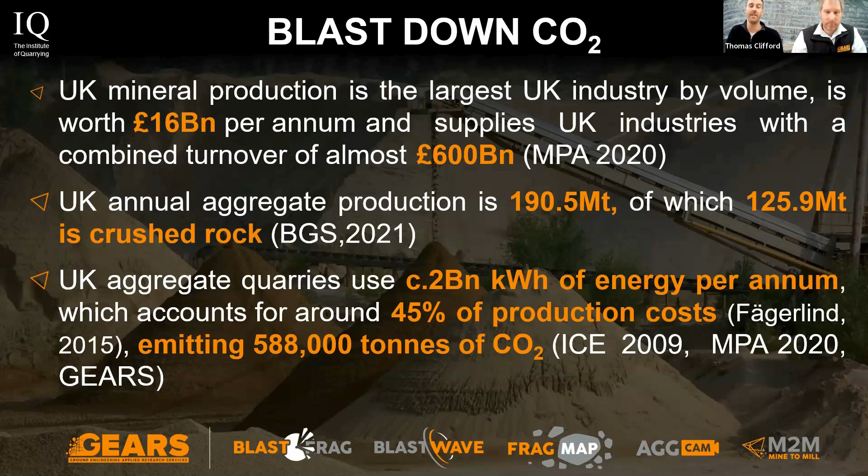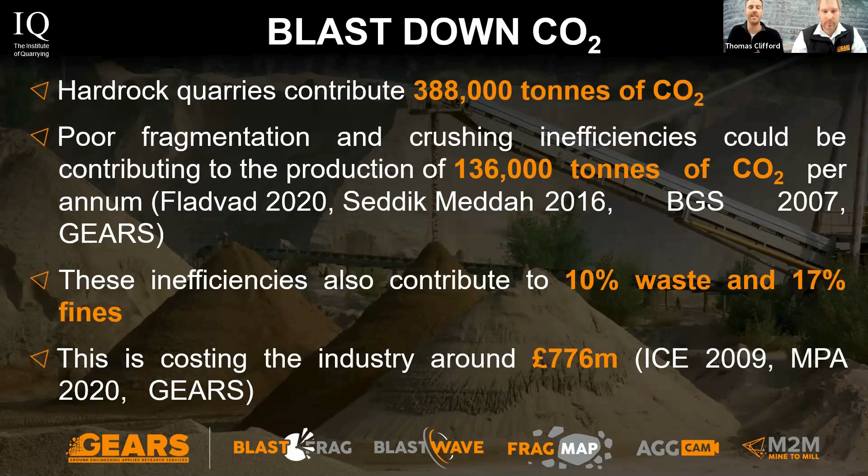Of that figure, the hard rock quarries specifically, which we'll be focusing on today, equate to about 388,000 tonnes of CO2. We know that poor fragmentation and inefficiencies in crushing operations can contribute up to 136,000 tonnes of that, based on the research carried out. The inefficiencies contribute to 10% waste and 17% fines within the process, and it's costing our industry £776 million per year.

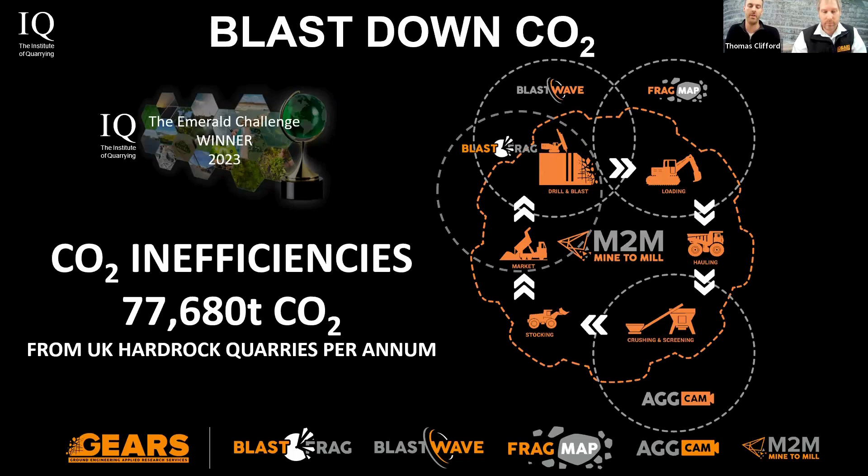As part of the Emerald Challenge, we're tasked to look at how we can reduce the CO2 inefficiencies, and the opportunity that we've found so far in the process is around 77,000 tonnes of CO2 from the hard rock quarry specifically. So we'll talk you through this process flow.

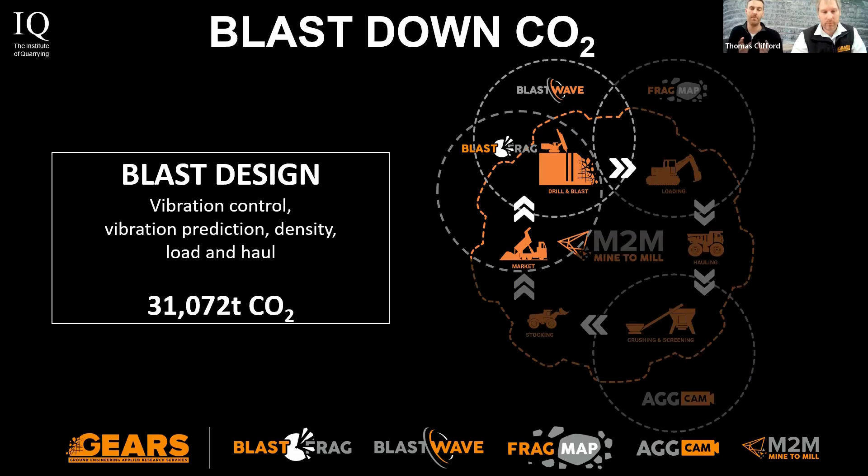Starting off at the very start of the process, looking at the actual blast design and how we measure the vibration control, review vibration prediction, the density of the rock and the load and haul processes. There's a 31,000 tonne CO2 opportunity there for us to focus on.

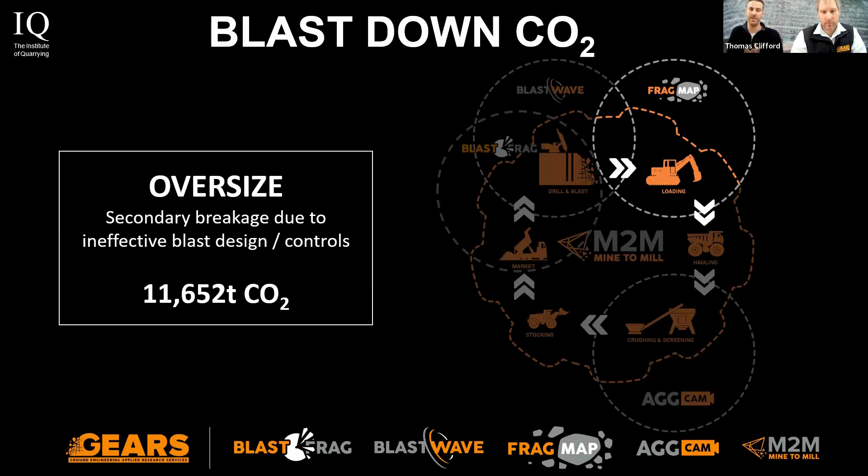As we then go into the oversize, after the blast, looking at secondary breakage due to the ineffective blast designs and how that has an impact on the CO2. In this specific area, around about 11,500 tonnes of CO2.

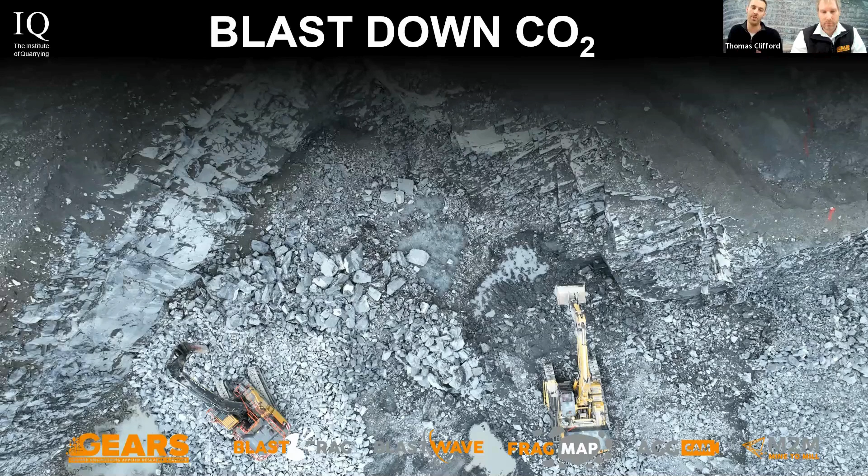Just on this image below, this is one of our development areas that we've looked at as part of the process. You can see there just the cost of the oversize. You have one excavator on load and haul operations, you then have the oversize in the middle, and then on the left-hand side you have the breaker. It's just all of this additional cost and inefficiencies in fuel burn, operator and man hours, and the oversize that slows down the throughput and production.

As we look at the blast design process, we know combined there's 42,724 tonnes of CO2. This just shows at each stage of the process the significant potential in CO2 savings and how we can be more efficient within the operation.

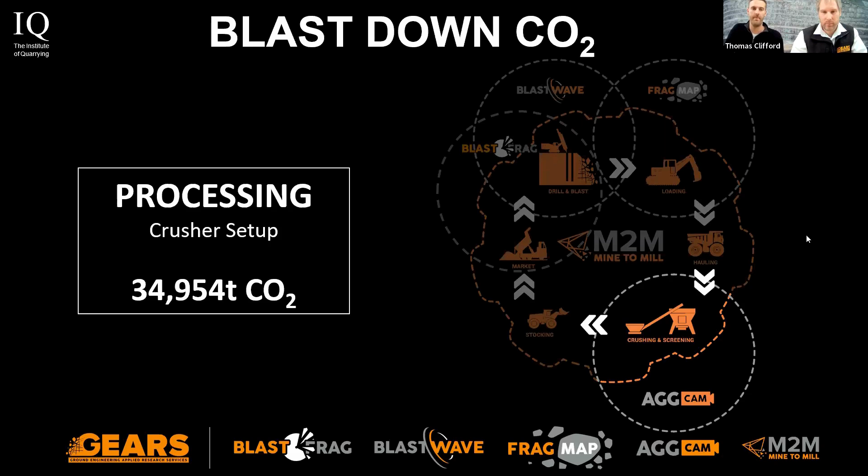As a result of this software being in place, in combination with our other telemetry, we're able to identify where we're not getting the required throughput through the crusher for whatever reason. So we've then focused on how we can be more efficient, not only in terms of fragmentation, but also site setup and our fleet on site as well.

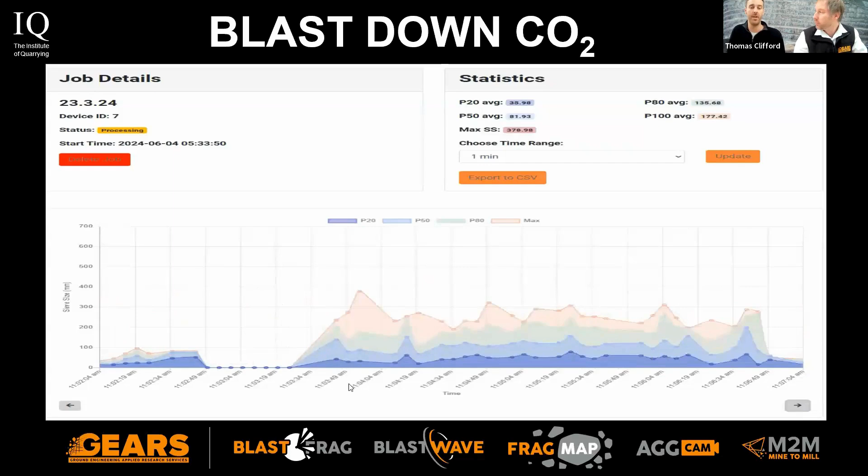We focused on Mountsorrel. This is where the project's been ongoing and links to the Emerald Challenge. We chose Mountsorrel for the scale of the operation, one of the deepest quarries in the UK, and it's recently had a new primary crusher installed, up to 2,500 tonnes per hour.

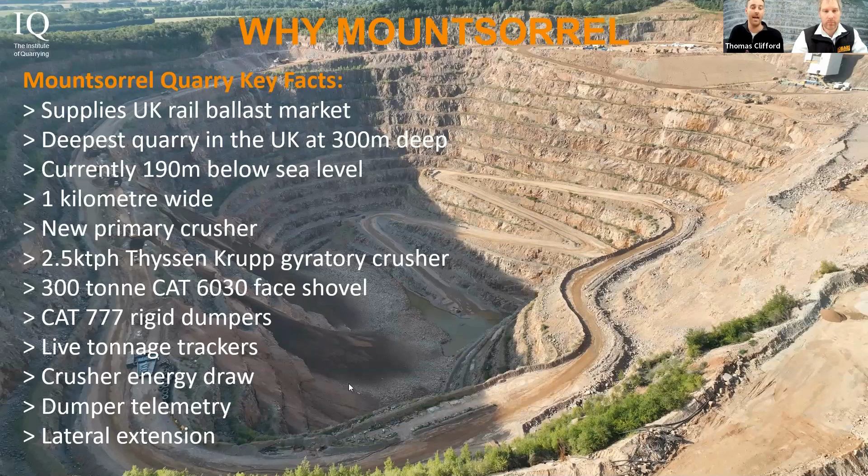The ThyssenKrupp gyratory crusher - we've got new plant on site, including the 6030 face shovel, a fleet of Cat 777 rigid dumpers, and we've also got the ability to track telemetry and information and statistics at every stage of the operation, so we can really focus on how we're performing and improve the operation, which in turn we can use to reduce the CO2 impact and associated cost savings as well.

It's one of the largest quarries by production tonnage in the UK, and that enables significant CO2 and cost savings, exceeding the smallest of savings applied across the tonnage throughout the year. It has significant potential.

As I said before, we're using state-of-the-art AI and machine learning software, developed as part of the Emerald Challenge through the Institute of Quarrying, and we're measuring the entire mine-to-mill efficiency of the operation at Mountsorrel. The aim is that, utilising Mountsorrel as our initial test area, we can then branch that out to other sites at any sort of scale and level.

We've also got a really engaged workforce, and we've really had to involve everyone at every stage of the process to be able to get everyone to buy into this project and why it's so important.

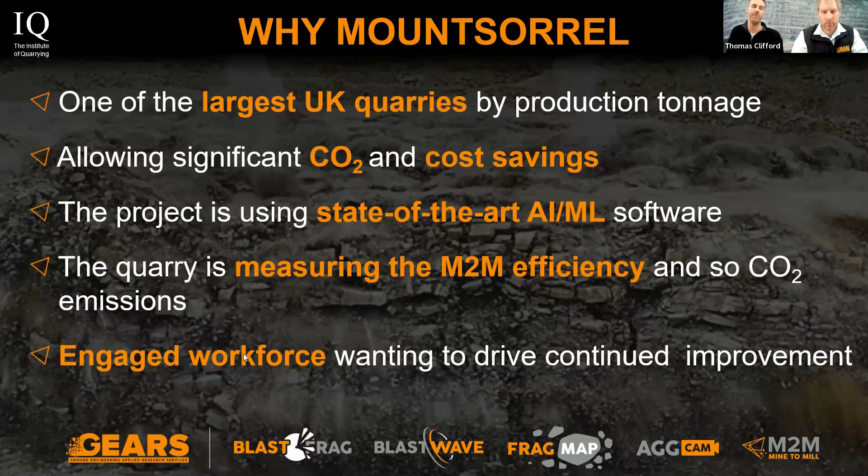So our initial aim with the Emerald Challenge was using Mountsorrel as our initial test site, to determine if enhanced blast fragmentation would reduce CO2 emissions.

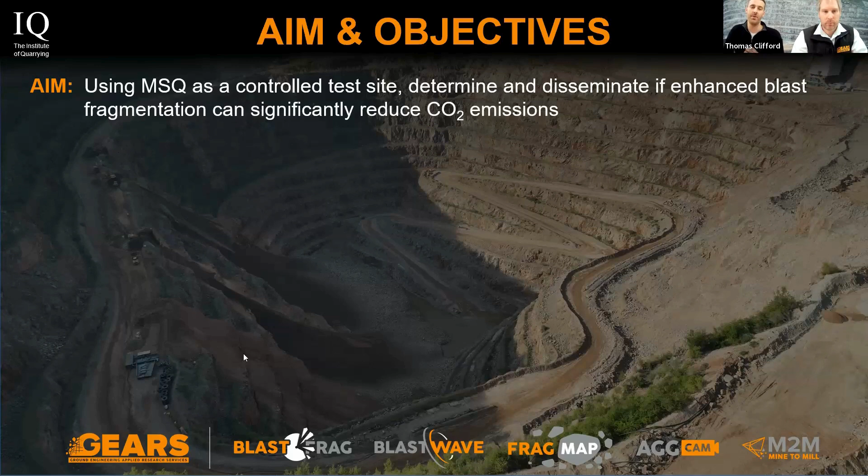Our initial objectives were to measure the following from a typical blast, which gave us our baseline results. We looked at the blast pile fragmentation, the average dumper load and output, primary crusher energy usage, the fragmentation tracked on the AggCam, and the dumper and excavator fuel consumption.

We then looked to vary the blast design and remeasure, just to determine how different factors have an impact on the CO2.

So we've analysed the data and prepared a summary project, which was submitted to the Institute of Quarrying, and it's also been published in the Quarry Management magazine as well. As part of this, we're presenting our findings. Thanks so much for running through where we're at so far with the project.

So I'm going to run through now an example of the blast analysis that we've run.

This particular blast was 50,000 tonnes, based on the belief that larger blasts are cheaper, and we wanted to increase our blast sizes to see how that had impact on CO2 use and inefficiencies on the site. This shot was in a confined bench in the development area, had multiple rows, and based on increasing the blast size up to 50,000 tonnes, presented an approximately £1,000 cost saving based on standard designs.

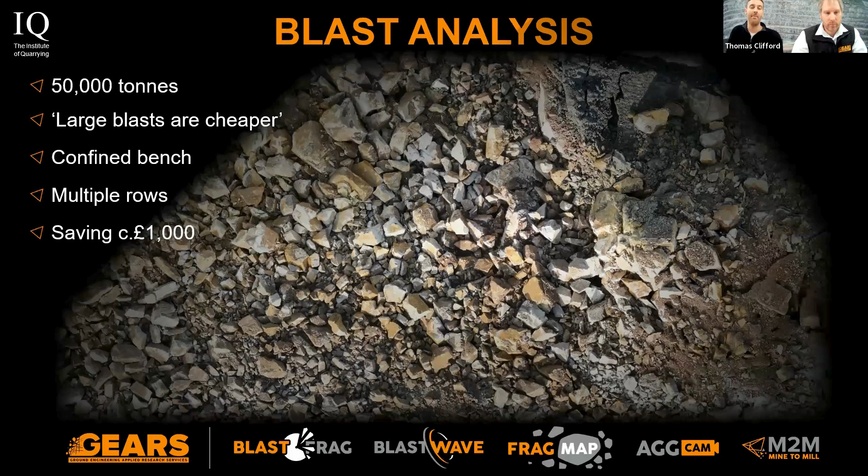What we actually found when we ran the analysis, in this particular location, we identified significant breakback, and the software, once filmed using the drone, identified significant oversize within the blast pile. This is an example from that exact blast, and you can see the particle sizes increased from our standard size.

We then ran this through the software, and this is where we can really see the impact of block size within the shot. We compared this - you can see the trend line across two of the previous blasts, going into our oversize, based on our optimum sizing for our crusher, which we determined at 1,000 millimeters, and then our percent passing throughout the blast. You can see relatively similar results for those two standard blasts.

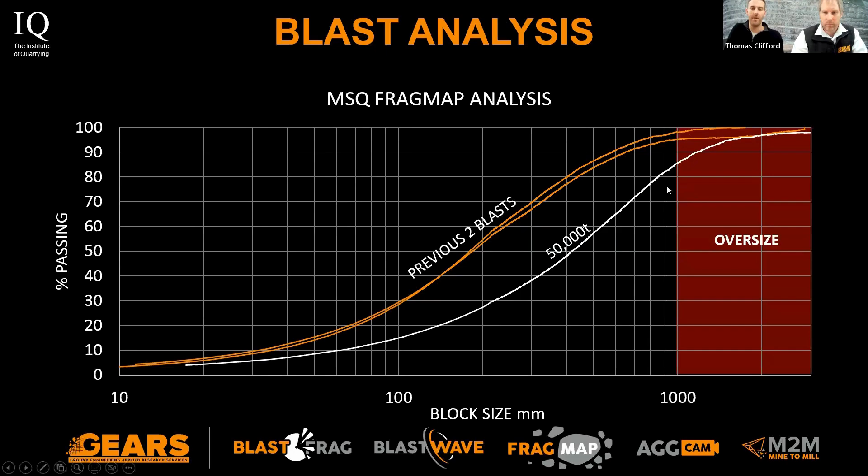When we actually ran this particular blast through the software, you can see the increase in oversize as well, which was actually a 10% increase in oversize on the previous two blasts, 230% increase in the 50% passing point, 300% increase in secondary breakage post-blast, and that led to a 700% increase in breaker arm time.

At Mountsorrel, we have a breaker arm within the primary crusher. Any oversize that gets to that point can also be broken down using the breaker arm, and that 700% increase on standard operations shows it's having a significant impact across the blasting operations and our efficiencies. At every stage there, we have potential for trucks waiting, standing time, reduced throughput, plant idling, and all of these areas impact our CO2 use on the site.

As a direct result of the poorer fragmentation we found in this particular example, we found a 15% increase in CO2, which is obviously an area we want to reduce and focus on, and a 7% increase in costs. So it just shows how the difference in varying factors from geology to blast size to location can all impact not only the CO2, but the costs as well.

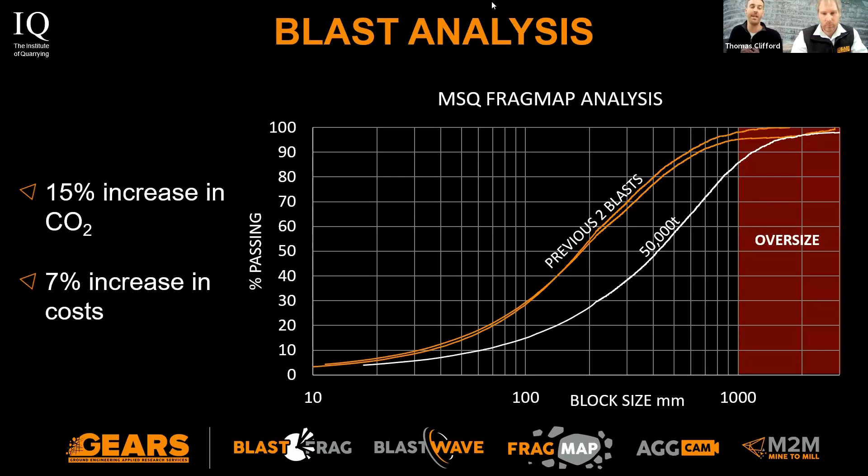Perfect. And then over to me. Over to Tom, thank you very much. So yeah, thanks, Oliver. Obviously, Oliver's given insight into what's happening at Mountsorrel, and it's been a really good journey.

Now, from a GEARS point of view, we're basically an independent consultancy. We're a very small team, but we work with a company called NewGradient. We're in a joint venture with them, and they are experts in artificial intelligence and machine learning. So with them, we've basically been developing these software solutions that Oliver's been showing you.

Before I go into what we've been working on and how it all fits, and I suppose it's enabled Oliver to do what he's been able to do at Mountsorrel, I'll just quickly explain my background. I used to work for Aggregate Industries, so I started off my career as a geologist and geotechnical specialist at AI. I was there for about 10 years. I then left to focus more on the engineering side of things, so I joined this massive consultancy called Atkins, owned by SNC-Lavalin. They're one of the biggest mining consultants in the world.

I got to spend an awful lot of money on developing the technical understanding around blast vibration, really doing in-depth research into that, which I'll talk a bit on later. I spent about 10 years with Atkins, and then Paul McMillan, who set up Gears, invited me to join Gears and develop this software solution.

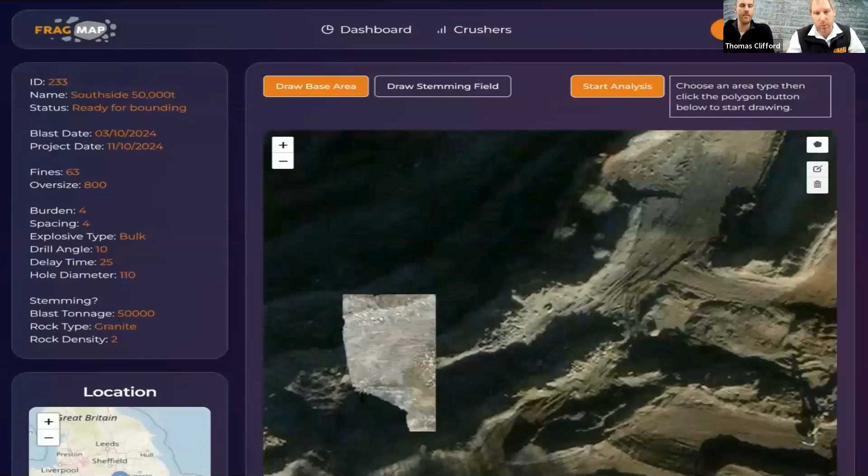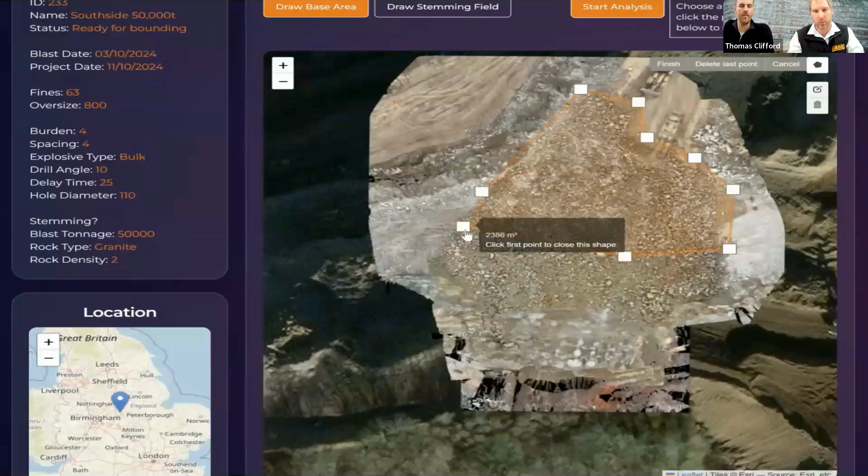We do, should we say, the characteristic - if you pick a part of the blast pile that looks representative of what you're going to be digging through. You don't have to do this straight away. You can collect the drone imagery, you can dig into the pile, but basically you go and identify an area that looks nice and representative of what's happening in the blast pile.

Now with the stemming zone, where you've got the coarse stuff at the top, you can then draw a second field. What it does is bring the stemming zone field, because that's just on the surface, against what's typically happening in the blast pile, looks at the areas involved in the tonnage, and brings the two things together. So you can see here it's just running on the right.

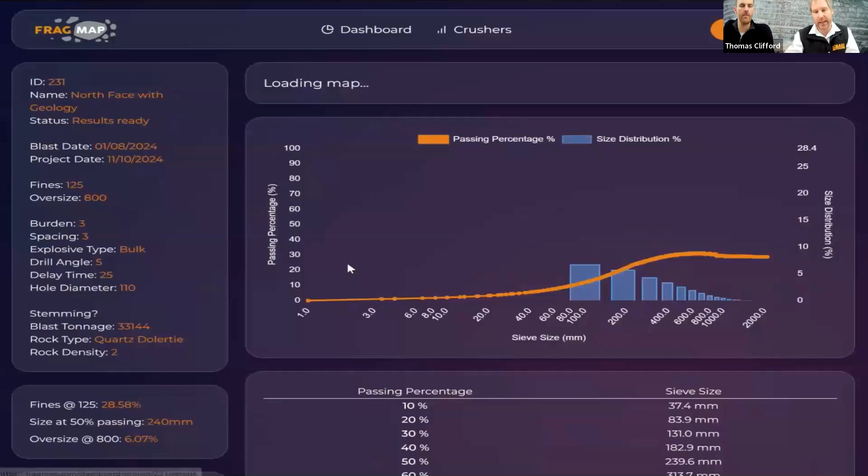This is an example of one we did up with Bam Ritchie's and Tarmac up in Scotland. Hopefully it's playing through a video, and hopefully you can see the quality of the analysis that's going on. We don't know of any other system that's operating to this kind of level of detail.

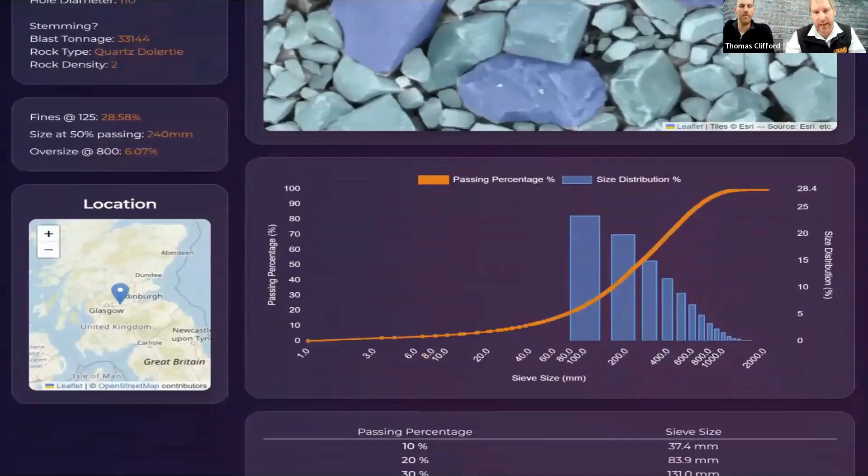Most systems that work out there use what we call a mesh function, and it has to put basically loops around everything that you've got in there. But with blast piles, you've got to look at everything individually, and this is where the artificial intelligence comes in. So it does the analysis, and you can see on here it basically produces a grading curve for you.

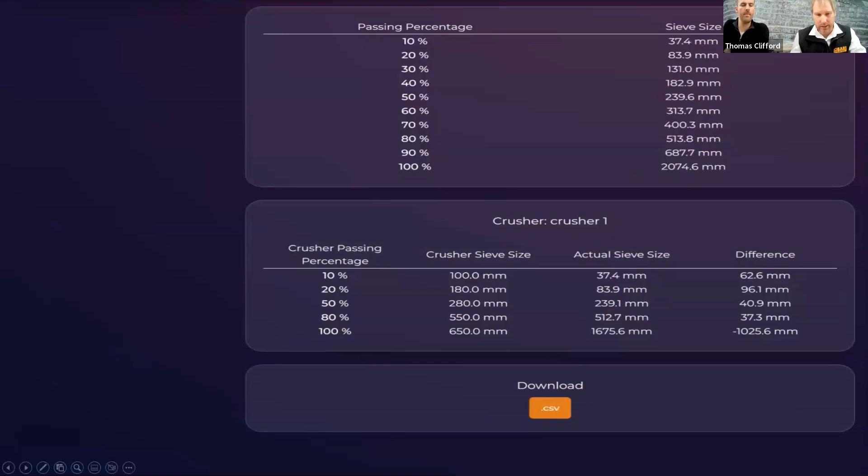So for the blasting contractors and the operators, we've got what we could almost call quick KPIs. If I go back on the left-hand side here, for this quarry they've set the fines at 125 because it's a low value product. Once it goes into like an MOT material, the value here is on the 14 mil. So on here we set the fines, and they're running about 30% fines on it, which they know.

And this is where we can look at changing the blast design to try and reduce the amount of fines being produced. You can see on here the average size, it's actually really quite fine - it was deliberately blasted that way. And what we're looking at here is you've got a 6% oversize. So you can get some really quick KPIs out.

Now that helps both the operator and the contractor, because when you're talking about pence per ton, what we can now do is independently assess it and say, right, well yes we can reduce the pence per ton, but these quality metrics are going to be impacted, or vice versa. On here you go, actually we could probably go slightly cheaper and take something slightly coarser, but at least we can talk about the impact on quality.

So, as I said, it's doing a couple of different analyses in there, using this artificial intelligence engine. Now, in order to process Oliver's 50,000 ton blast, we calculated the amount of processing time and cores used to do it. So to run it, it has to run through a supercomputer.

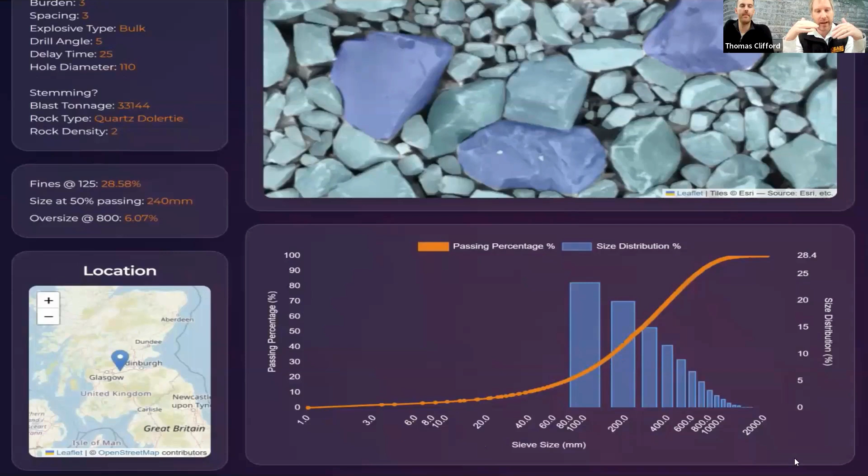So the next challenge is, well, we're still looking at the surface. How can we do that kind of quality assurance over it? Now, some of the users are kind of like, well, it doesn't really matter if it's not perfect. What's important here is it's repeatable. And the front of the blast pile is likely to be the coarsest part of the blast pile, so actually it's a nice conservative measure. If we keep repeatedly surveying the front of the blast pile, at least relatively, we're seeing the change.

But we kind of wanted to get more data through the blast pile, and that's where we pushed on to the AggCam system. So with the AggCam system, as Oliver's shown you, we wanted to develop the technology targeted at quarry pricing, not mining pricing. So the challenge was, could we take this software, this AI engine, and apply it to a GoPro? That was a challenge at Mountsorrel, and clearly we did it successfully.

So whilst we're very comfortable we've got the quality sorted, the critical thing for us in the quarrying industry is it needs to be cost effective. I would like to think that we've hit that brief as well. But the idea behind the GoPro is we wanted a system that could be deployed pretty well anywhere. So with a GoPro, we can put it on the back of the dumper, or on the primary so you can look at dumpers tipping off. You can analyze it there, or as shown here, we can look at it along a conveyor belt.

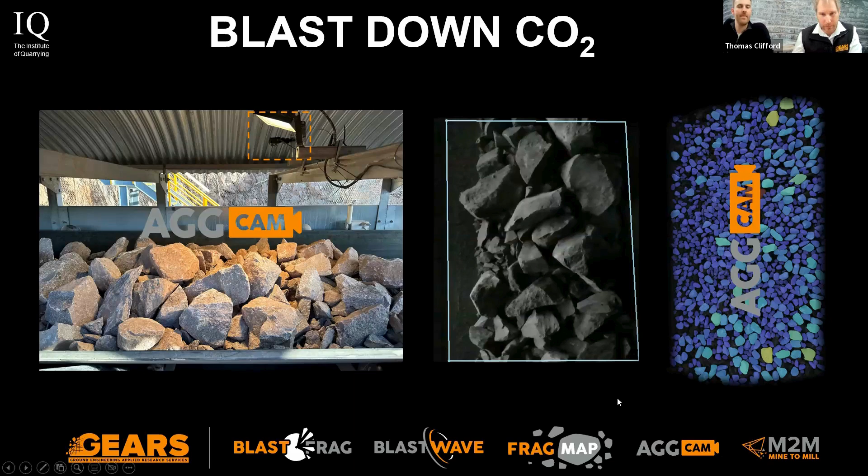So as Oliver said, when we first started this, the first thing we were looking at is what is the potential impact on CO2. Oliver's presented the national statistics, and we've got various different sources, we built this up. But the big one, if you combine the secondary breakage and everything to do with the blast design in terms of how well fragmented it is, in the UK, we've got almost 43,000 tonnes of CO2 that's targeted, which we potentially could save.

But in order to do that, we've got to work with the blasting contractors, and we need to have the right information as the operator to go, right, yes, we need to spend a little bit more money on the drill and blast, and that will see the downstream savings, both in terms of cost, but secondly, in terms of what's that CO2 impact.

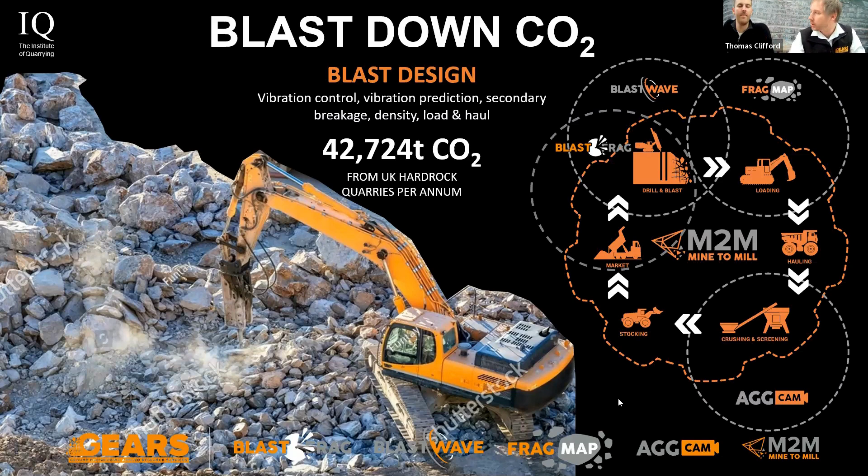And that's what kind of excites us, as being completely independent. There's no agenda here. It's like, right, go and do your work, survey it. That's the data that's coming through. And I think that hopefully is going to enable, and Oliver's demonstrated, better conversations, more informed conversations within the business, but also with that contractor relationship. So to me, that's a critical element, being able to put some numbers behind this, some impartial numbers.

So we've done various other exercises with Tarmac. I'm not going to name the quarries and things, but I'm going to draw on some other case studies that we've been working on using these systems.

And one case where we were looking at the extreme end of CO2 impact and cost was where we were highly constrained because of PPV on various blasting, and it was about 150,000 tonnes that we were looking at blasting, and we were able to do a full cost analysis, and I'll show you that in a moment. But basically it said where we were in this extreme case that the fragmentation was being really compromised because of PPV, it was costing the operator just north of £2 a tonne.

And interestingly, looking at the Mountsorrel stuff, when we start looking at the cost of secondary breakage, it is very expensive when you look at the full mine to mill cost. But not only that, because of the secondary breakage, your primary that does a drop ball, I think it's using, is it 55 litres an hour?

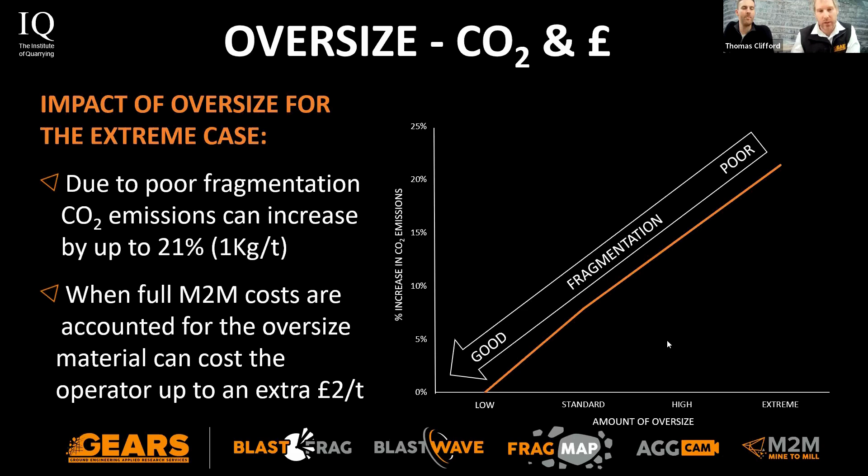When you look at the CO2 demand on that, it really is very significant. It very quickly works up to a 21% increase in CO2, that's a kilogram per tonne. So it's a big issue and something we need to really look at.

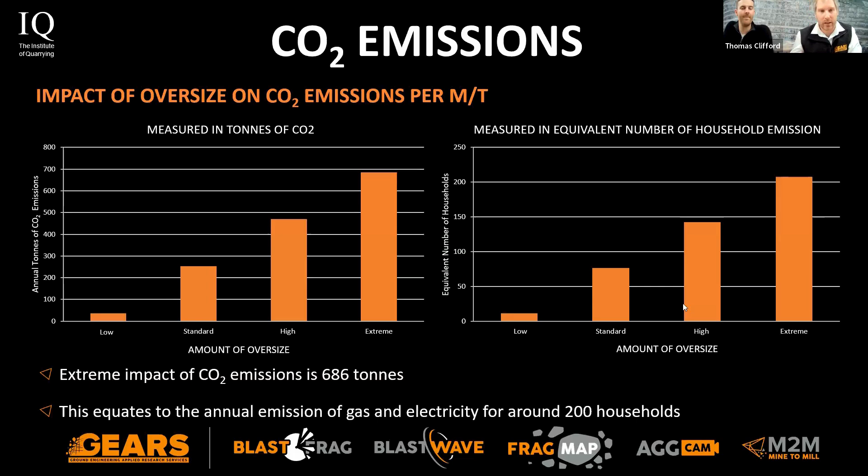To put that CO2 in context, let's take a 1 million tonne quarry and see what that looks like. At the extreme impact of CO2, we're potentially emitting 686 tonnes of additional CO2 that we shouldn't really need to produce. That's equivalent to the emissions of gas and electricity from about 200 households. That's a village. That's a lot of CO2 we potentially could reduce.

That leads us to the next part of the study: what's causing the poor fragmentation. There's lots of reasons, but I'm picking out a couple to talk through today. One big thing we're looking at is PPV control, and that's where Project Blastwave is really taking off. I'll show you some quick examples.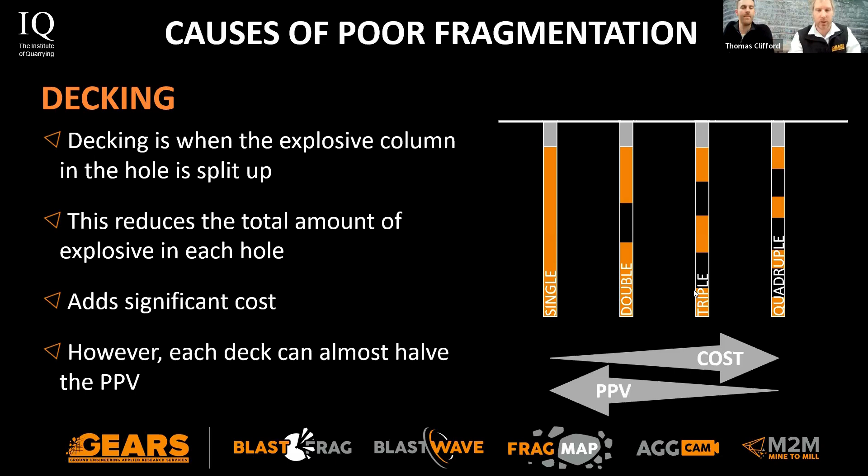Normally when dealing with PPV, what we like to do is deck, either double, triple, or in places quadruple decking, and that massively reduces the PPV. It's not exactly the same as saying it'll reduce the nuisance impact, and that's where Blastwave is taking a deeper look. But it significantly drives up the cost, because once we get into the decking scenario, we're really looking at using digital electronic decks, which are phenomenal but add cost, so we need to make sure that's properly justified.

Once we start in this extreme case, and on this one it was because of a railway line we were blasting next to, you can see the costs start significantly increasing in terms of design cost. This one had a really heavy consultant cost associated with it for third-party controls, and an increase in secondary breakage. On this case study, the secondary breakage cost is quite low because it's been offset by a massive increase in the drill and blast cost.

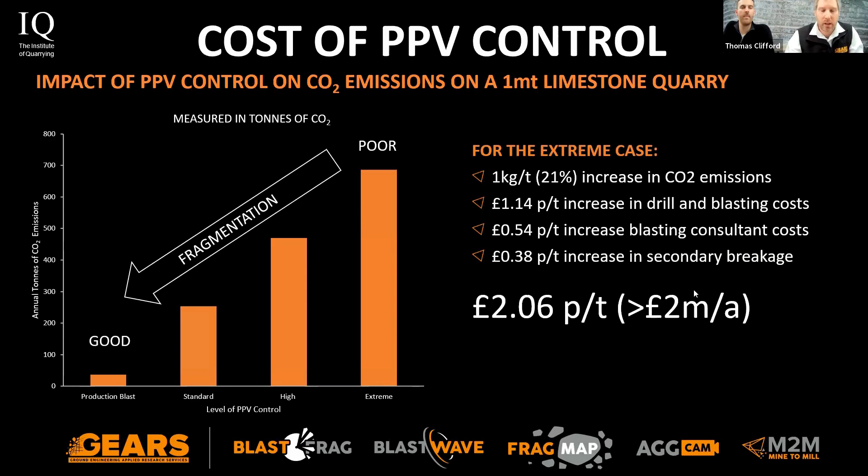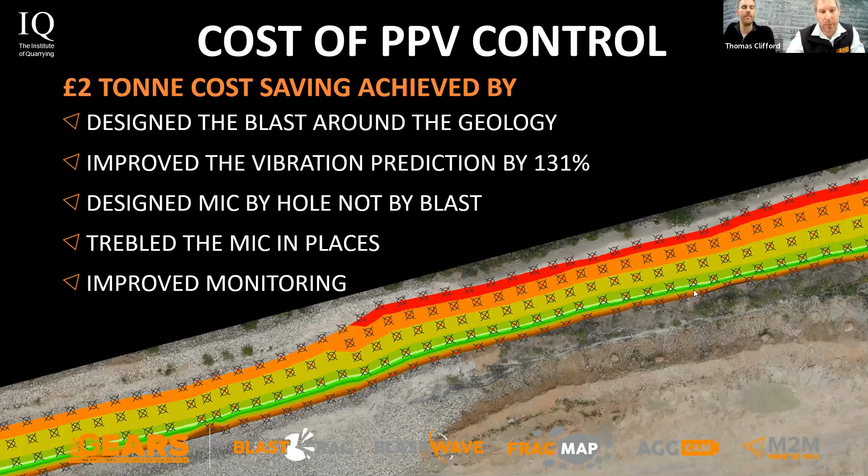On this case study, we were able to redesign the whole blast. We looked at the geology and its impact, and improved the blast vibration prediction by 131%. We changed how we were designing the MIC, looking in more detail at each hole, limiting it by one hole rather than limiting the whole blast. That enabled us to treble the MIC in places, and obviously trebling your MIC makes a big difference on fragmentation. That's how that cost saving actually came to light.

So that's PPV control. Second thing is timings. I'm not going to go into lots of detail, but I mentioned earlier there was this pioneering work done out in Sweden that we got our hands on.

These are physically sieved blast piles, about 10 of them. The author, to be honest, I think had almost an agenda—I don't think they were very keen on electronic digital detonators. So he did a comparison of using digital detonators on very short delays against using a non-electric on a much longer delay. He concluded the non-electrics significantly outperformed the digital detonators, explaining it's a 58% increase in average size because of the very short delays.

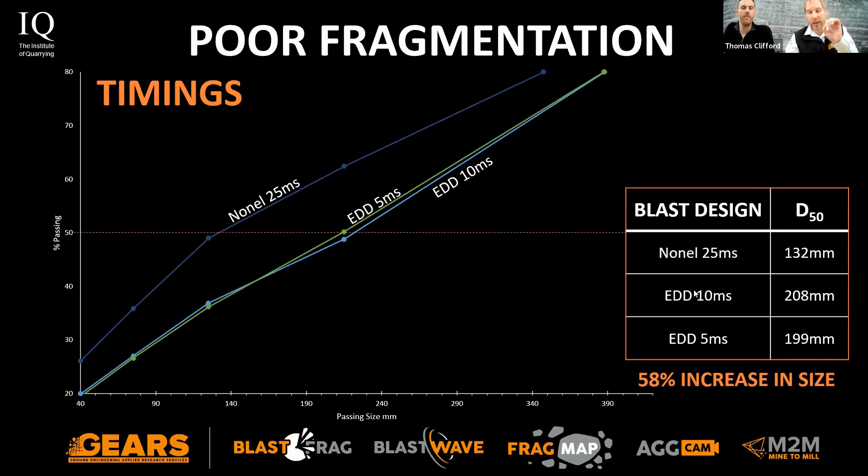To me, that's not actually about electronic digital detonators, that's just looking at the timing. What he should have done was then run a digital detonator at 25 milliseconds. But what this highlights is that timings are critical—it doesn't matter what initiation system you're using. That's what the paper concluded.

Because we had access to the data, we could do more of a deep dive. What the author didn't do was look at the loading times associated with the non-electric and the digital detonators. What was really interesting was the digital detonator actually reduced the loading time by 25%. That's massive—so if we look at it from a cost point of view, you kind of go, actually, there is a place here.

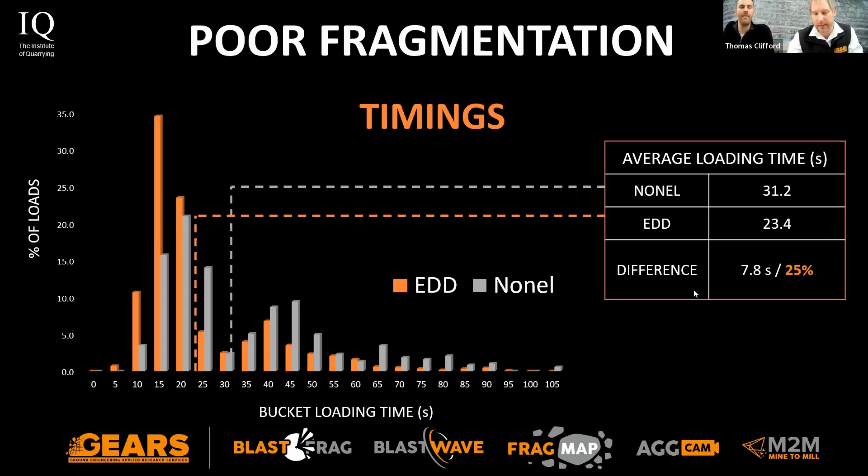Now, that's not to say that's the right solution for every quarry, but what this is really challenging is we need this kind of quality of data to start looking at what is the optimum design, what's the optimum timing design, and how it should be initiated. So this is quite exciting because it's a good conversation piece that can come out from this.

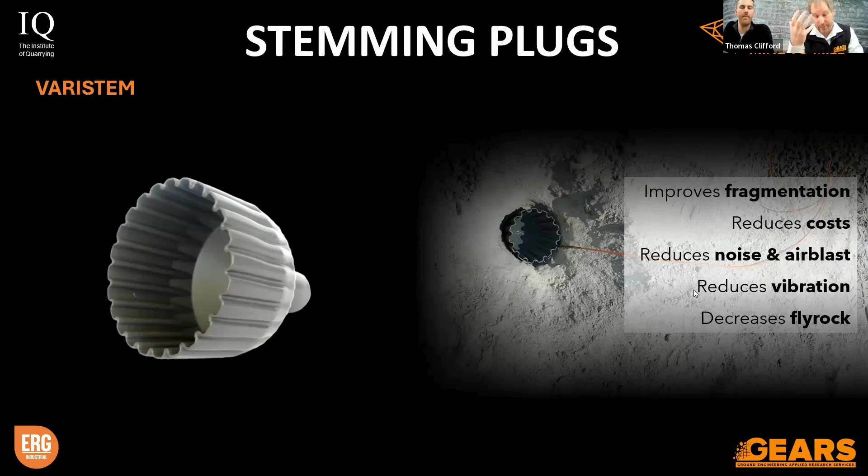The next thing I'll talk about is stemming. So we've been looking at the stemming plugs, which are distributed by a company called ERG, and there's been quite a lot of research done in terms of the use of those. This is some of ERG's material from working in mines around the world.

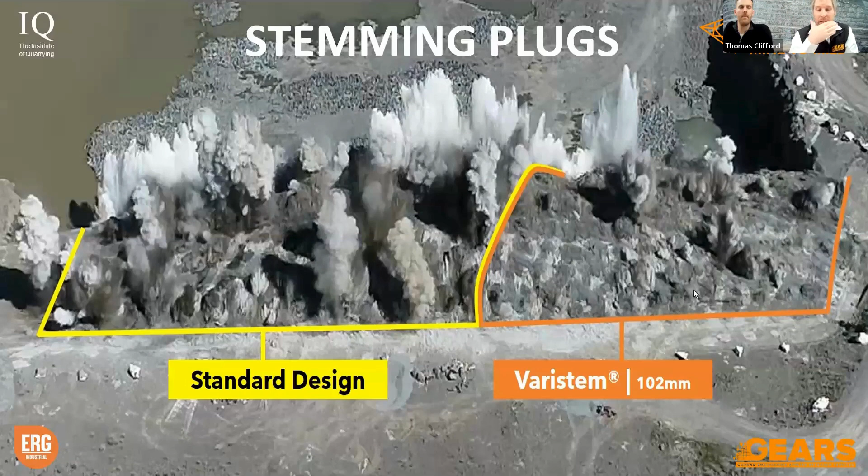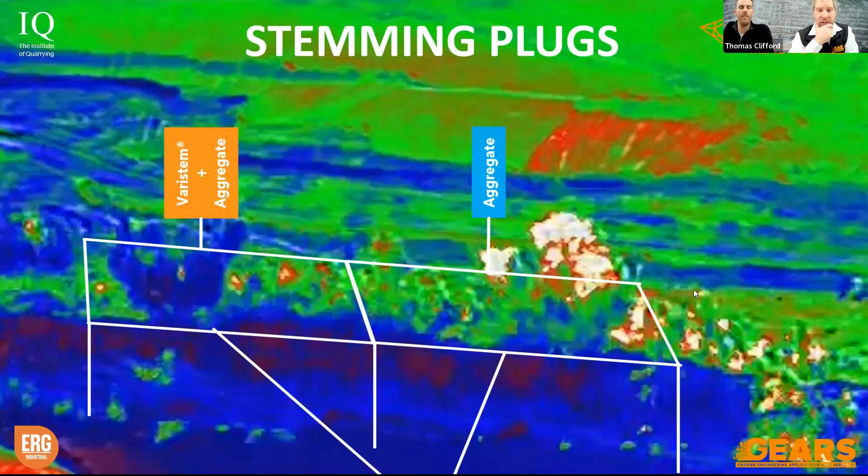What you can see here is the stemming plug is trying to produce an airtight gap within the stemming. It improves the efficiency of the stemming, so you can potentially use slightly less stemming as well. That shot, that photo, kind of speaks for itself in terms of what it can do. They've also looked at using infrared to look at the energy escaping, and you can see that the Varistem is holding the energy in.

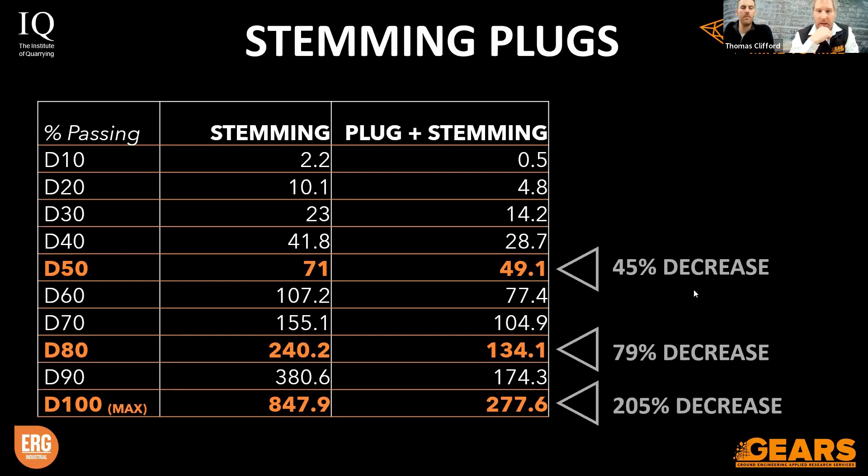We've done various trials and it has proved a similar thing to what they've published. What they're saying is because that energy is being retained within the hole, you've got more energy going into breaking rock as opposed to being released out the top. They're quoting at the D50 level a 45% reduction in particle size, which is massive.

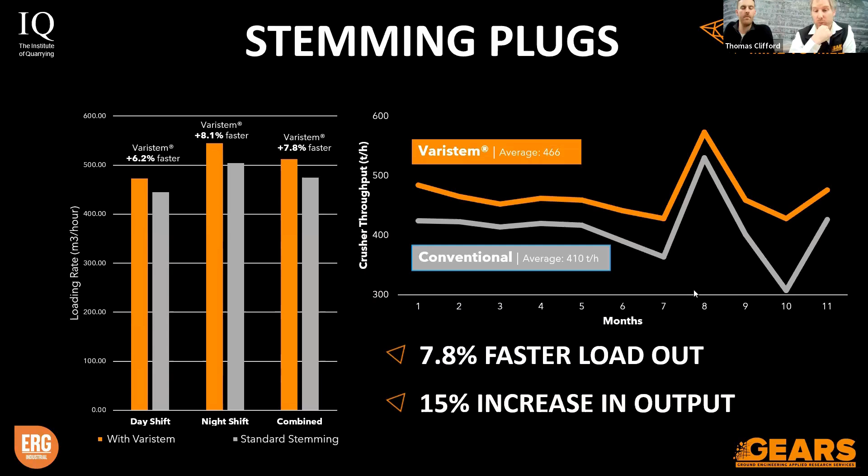Now, what I'm also really interested in is what that means for the processing plant. They're saying it's a 7.8% increase in loadout, which is important, and that's resulting in a 15% increase in output. Those are quite easy things to measure, so that is of interest.

Now, in terms of what's happening with these stemming plugs, to put a bit of science behind it, this graph shows what we're expecting to happen on a standard stemming design: as the bulk initiates, you get a wavefront being pushed out, dictated by the gas pressure. The higher that gas pressure, the higher the VOD, the velocity of detonation, so that should give you more of a shock.

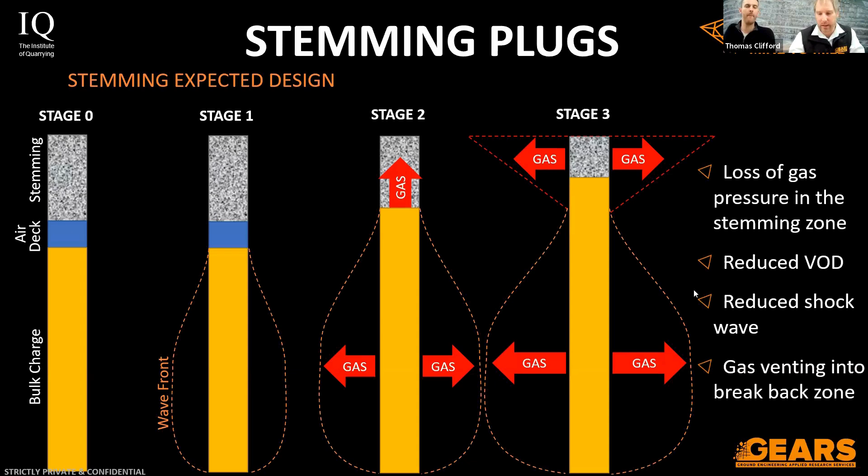In the stemming area, because stemming is not airtight, the gas pressure comes through that stemming. The stemming zone is normally fragmented and hasn't got a lot of weight on it, so as that gas comes in, it can lift it up slightly. As soon as you've got lifting of your beds, you can't get that vibration energy through there, so you're not going to develop such a strong shock wave to actually fragment it. I'll show you some videos later of that kind of separating.

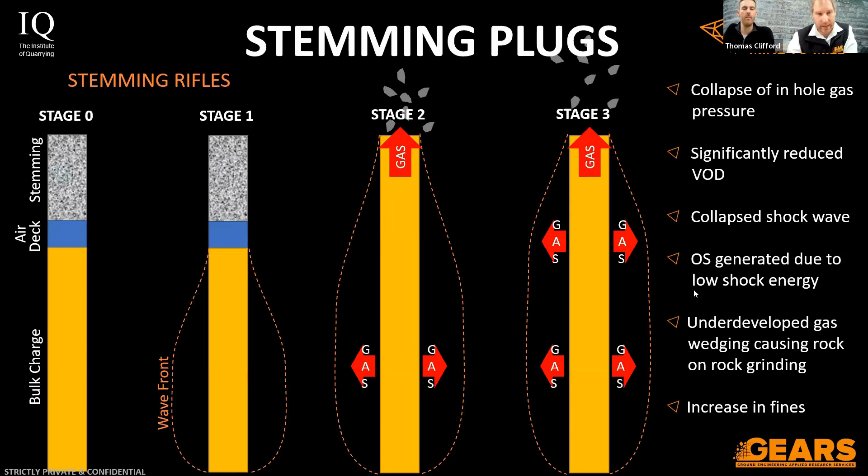So if you don't have enough stemming in there, this is when you can potentially have rifling, you've got ejection there. What happens then is you get a reduction in that gas pressure, which reduces the VOD, so you've lost detonation, your shockwave energy. The theory behind the stemming plug then is it makes this airtight seal, and in doing so, it gets that gas pressure up to its optimum, increasing that shock energy.

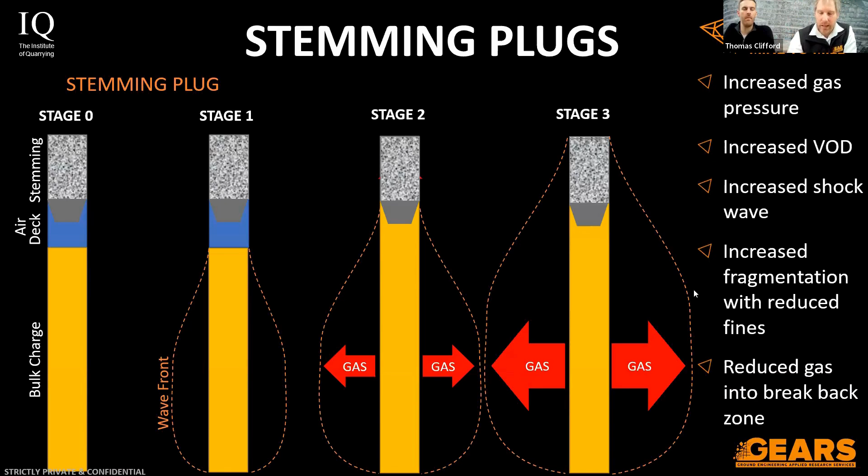From my point of view, what also interests me is if it's better able to confine that stemming zone at the top, then we should get more chance of getting shock energy through there, because it's just not letting that gas initially get in and lift the top. So it gives you a more stable column which goes closer to the surface.

The other part of this that we're interested in, again coming back to our Project Blast Wave, is looking at the potential reduction in air overpressure. In South Africa, they have much more consistent good weather than we have in the UK, so air overpressure is very difficult to measure here, particularly because of wind. In South Africa, they've done long-term studies and demonstrated that the stemming plug is reducing air overpressure through the stemming zone, which you'd expect if it's operating the way we think it is. You can clearly see here a kind of 70% reduction in air overpressure, which is really exciting, particularly from a nuisance impact point of view.

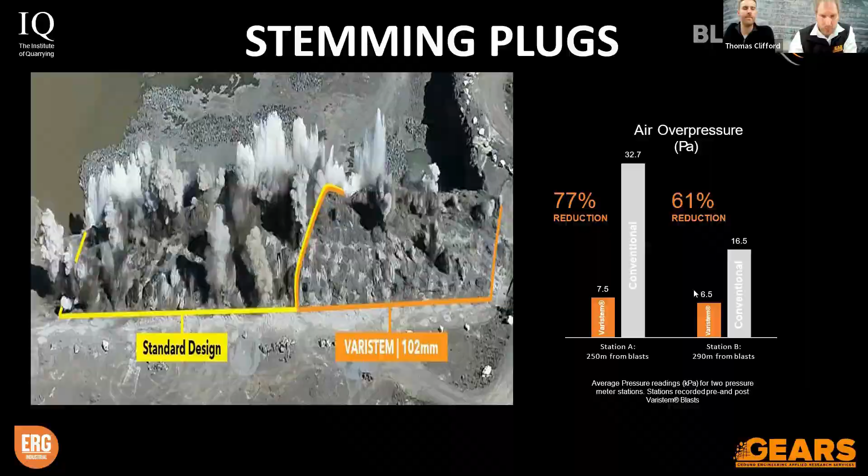So this is one of the Tarmac stemming plug trials.

There's just a video here. This shot is half and half. You've got one side without the plugs - the side closest to us has two free faces that don't have the plugs in. The other side does have the plugs in, so arguably that side is more confined, meaning you'd expect better fragmentation on the right.

That's the drone survey of the blast, and you can see on the Varistem side it clearly is finer.

Now what we're able to do is run that through FragMap and really look at the difference between the two sides of the shot. We're able to measure up to 11% better fragmentation. For this site, there's a core area where they want it to go through the crushing plant, down to about 100 mil, so we can take an average of what's happening over that 100 plus, and that was about a 7.5% improvement on fragmentation, which is really exciting.

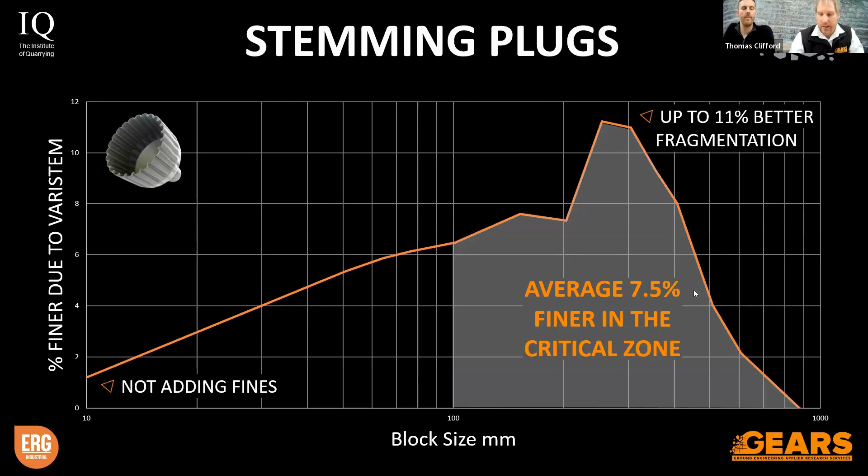There's more work ongoing with those at the moment, and that's something we're about to start with Mountsorrel.

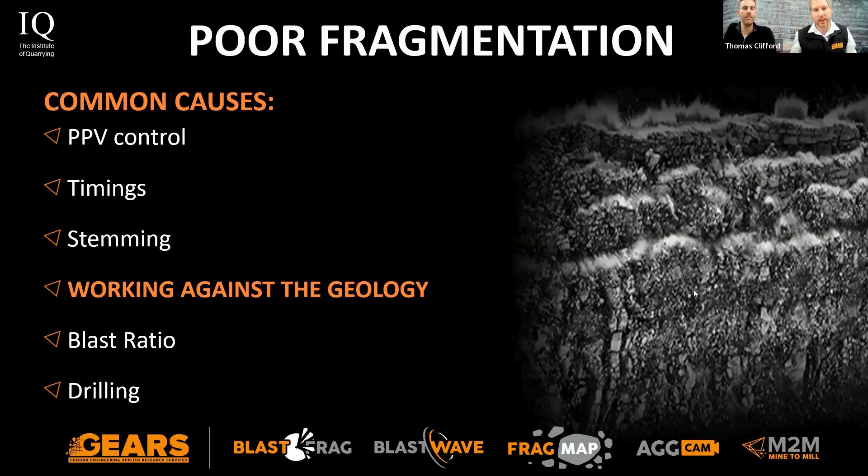So that's stemming. Now the next thing I'm really passionate about is working with the geology, and I think this is something, obviously with my geology background as a geotechnical specialist, that we're really passionate to bring to the industry, bring to contractors, and just get people more aware about working with the geology.

So this is a shot - thanks to BAM Ritchies on this one, actually. This is with Aggregate Industries. It's a really good case study we got invited in on, just to come and have a look at what was going on. We walked onto site, and the first thing we noticed is they were firing completely against the geology.

So you get this horrible sawtooth effect. The impact of that means all the energy from the blast is running down these joints, causing a lot of blast damage which is visible. But what it's also doing is lifting that stemming zone further back, so when you come to do the next shot, you're not going to get as efficient a shot. That blast damage is going to impact you not from one shot, but potentially two or three shots behind you, just because it's giving you this kind of separation.

One of the things we picked up straight away - and it's easy to pick up as a geologist, but you don't see it until somebody shows it - is that underneath the stemming zone there was actually a shale band, a really fine shale band. As the shot went off, you can see the air overpressure just lifting off this stemming zone, causing this large segmentation.

So here, what they wanted us to do is have a look at the Varistem and see if we could really reduce that stemming length and do it safely, which the Varistem did perfectly. However, the problem wasn't to do with the blast design, it was actually the geology - it was down to this shale bed.

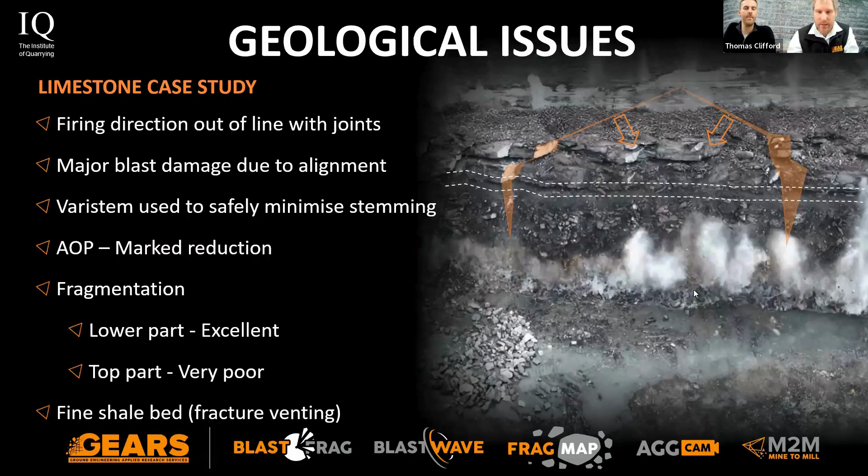So let me show you a video of that. This is the shot going off. As I said, it's got a very reduced stemming length with the plugs in, and it's held that beautifully. But as you saw in that video, you can see the top part of it just lifts off. It's a horrible scenario - this is where you get this kind of horrible stemming zone at the top.

And that's why in FragMap we actually ended up building this two-tier approach. One is to measure the stemming zone, and the second part was to look at the shot itself. So here, this is a FragMap, and you can see the massive oversize on the left, but the actual shot itself was really good - really fine, good shot.

They hit it really hard, but the coarseness is all due to that stemming zone. So that's why we do those two independent areas, and then bring them together to look at the whole analysis. There you go - it's like chalk and cheese. When I first did this, most people thought that was two different blasts coming together. It's not, it's the same blast.

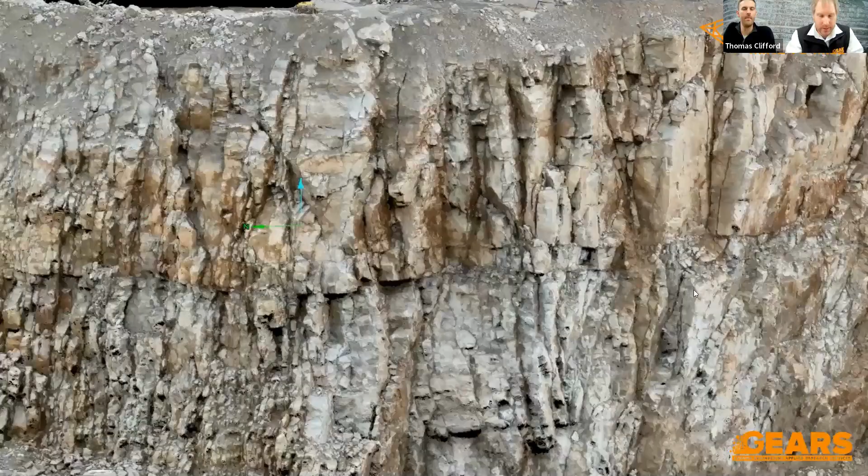It's quite critical. So sticking with that, we've been working with AI and Tarmac, looking at using drones to do better quality surveying. This is an independent one - it's actually Longcliffe.

We've been working with them as well, and this is a blast we just came and had a look at. We're doing a Varistem trial, so we flew it and dropped it into QuarryX.

On this blast, as a geologist, these kinds of things jump out to me. One is we've got that bedding plane coming through, and you can really pick that up in the survey. But you've also got a fault running around the back. You can see on the left-hand side that clay seam coming through.

The geology itself is slightly overturned and it's not aligned with your free face there. So looking at it, I'm like, I could do with an extra hole here and just slightly orientate the shot. Really easy to do in hindsight, when you've got a degree and 20 years experience working in geology. But these are the kind of things we can actually train people to see.

And that's what I'm passionate about picking up. The real advantage now is because we've got high quality drone 3D models, it enables the shot firers to bring the geology into that blast design and start moving things around to really work with the geology.

So this is the video of the blast, and you'll see it go off. As you can see on the right hand side, things kind of toppling over, massive breakback, because we're not quite in line with the geology. You've got things coming in.

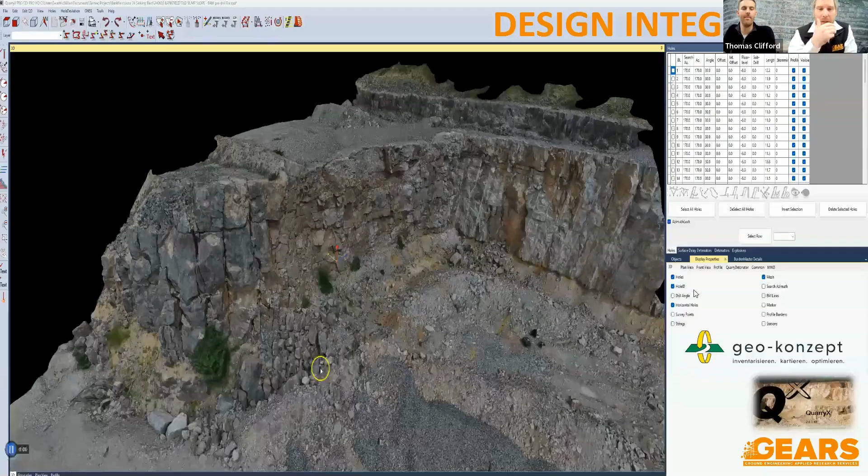So this is something we're doing with AI. This is Holme Park Quarry, and this is basically trying to look at the quality of drone surveying. We're really keen on drone surveying because it feeds the programs we're using, but also enables us to bring that geology into the design.

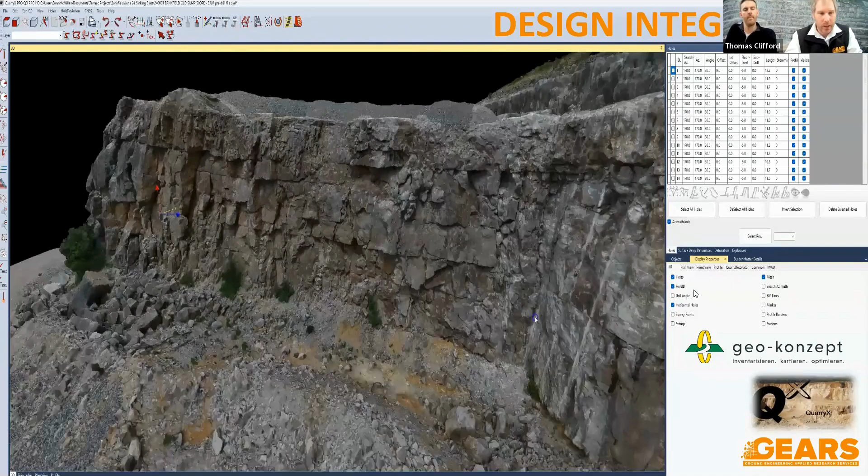So working with AI and BAM on this, and I'll show you some of the outputs from here - this is in QuarryX, so any shot firers on there will be used to QuarryX or a similar program - but that's the kind of quality we're able to produce. You can see how much geology we can pick up from that face.

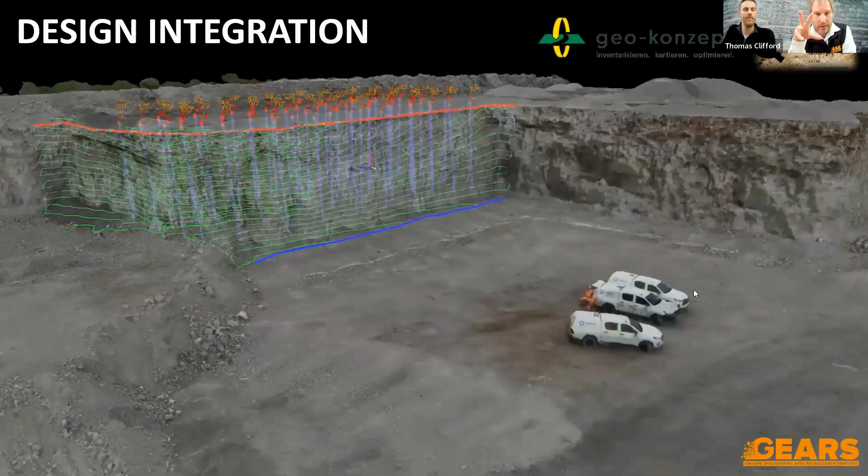So this is one of Tarmac's first plays with QuarryX and drones, and this is just basically showing a blast design in place. So the next part of it is to look at the real impact of geology.

So this is a quarry in Northern England. It's quite a famous one, and it's got some real difficult ground to blast. I'm going to play a video - this is a blast we were shown before we got involved, and where I've highlighted, you should see the face is going to move with the blast.

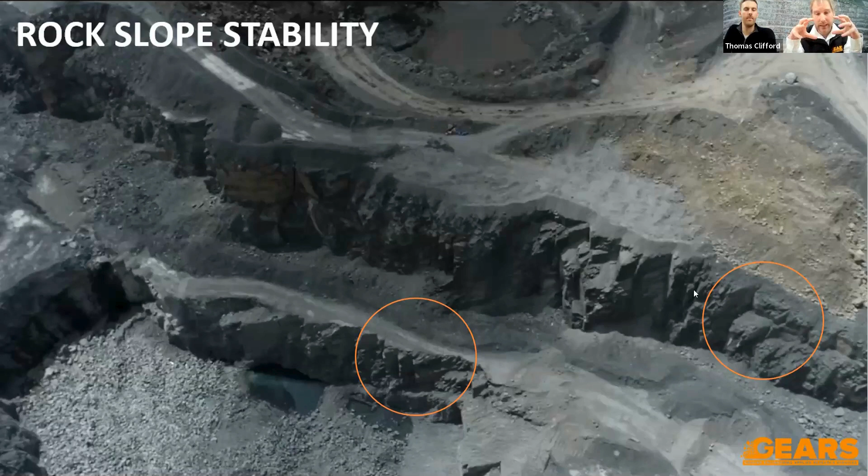Because of this problem, with bedding planes coming through and very low friction, we were able to bring our geotechnics and geology together and integrate it with the in-house blasting team at Tarmac to come up with a new blast design for the quarry to take out some really difficult rock. This is the video of it going off, and hopefully you can see those beds just completely shunt across.

Really quite scary, but it's well known as this phenomenon in this quarry. So we were brought in because there was a corner of rock, a triangle, that needed to come out because it was holding up the development of the quarry.

So it's actually that triangle at the bottom there, I'm just zooming in. Now the problem with that triangle is when you fire it, all the energy is going to go up the bedding plane. Historically, up in the back right corner, I think it was 300,000 tons of rock slipped down about 15 years ago. So this is really quite critical.

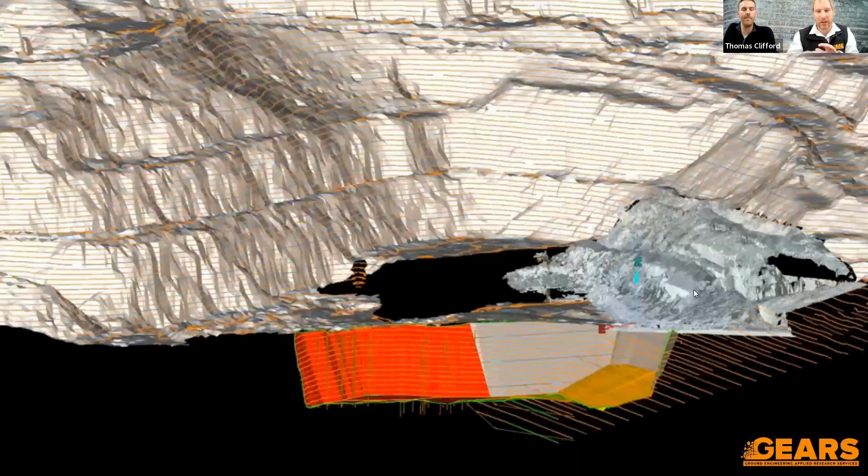That's the blast of the triangle. And what's really good, from my point of view, you can see none of the faces are moving. So what that enabled us to do was then have the confidence to go down and take some more rock. We're actually blasting through these critical beds, again working with the operator on managing how we're going to blast that through.

So sticking with the geology then, that's kind of an extreme case. But what we're able to do is really look at the geological influences on the blast design. There's lots of components that we do, but I'm just trying to take you through a very quick analysis we did up in Scotland.

So the first thing we do is look at the fracturing within the rock, called the fracture network, and we make a model of that. We then look at the stresses acting on the rock from the blast design, and then we look at the distribution of those stresses. That then helps us build up an idealized pattern design, and also what the initiation design is.

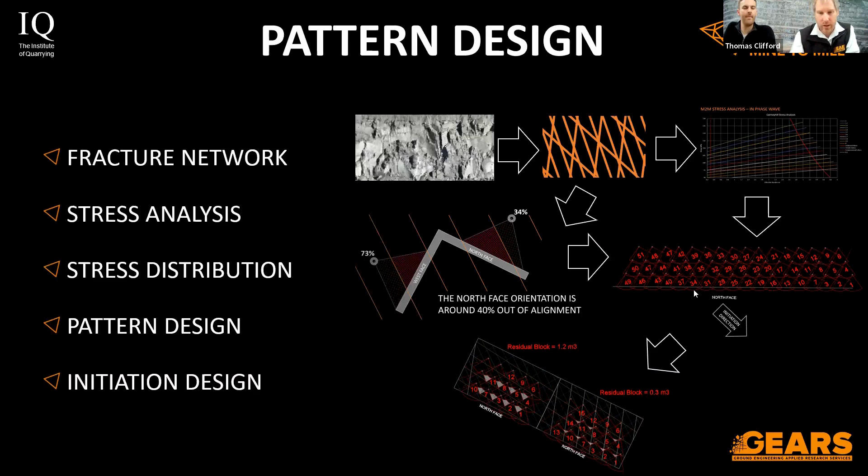So this is an example from Scotland that we did, where BAM Nuttall were firing, and the client was wanting to go to a staggered pattern. It was a quartz dolerite quarry.

Now what we did is we built up the geological model, and the contractor was like, look, we do it on a square pattern, we try staggered, it doesn't work, you get no benefit from it. So this is where we set up the kind of geological scene.

Take this as a plan view, just looking down. I've kind of simplified the fracture network. We pick out the critical joints in here, the critical fractures, and these are the two face orientations that we've got. In this quarry, predominantly they work the western face. The north face is just to open it up to make more of the western face, but the north face is horrific - they get really big oversize on it.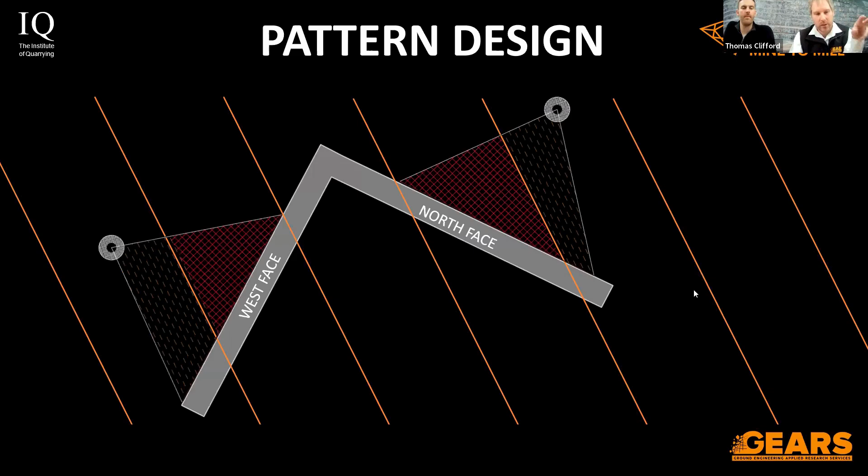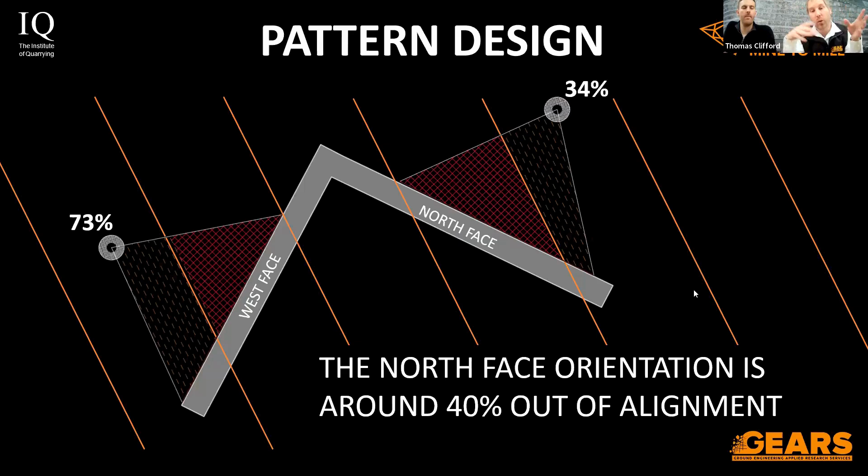So we then looked at the stress distribution for the two different faces. And what we identified was on the western face, it really did align well with the geology. But on the northern face, you're fighting the geology, which is the fundamental cause of what's going on.

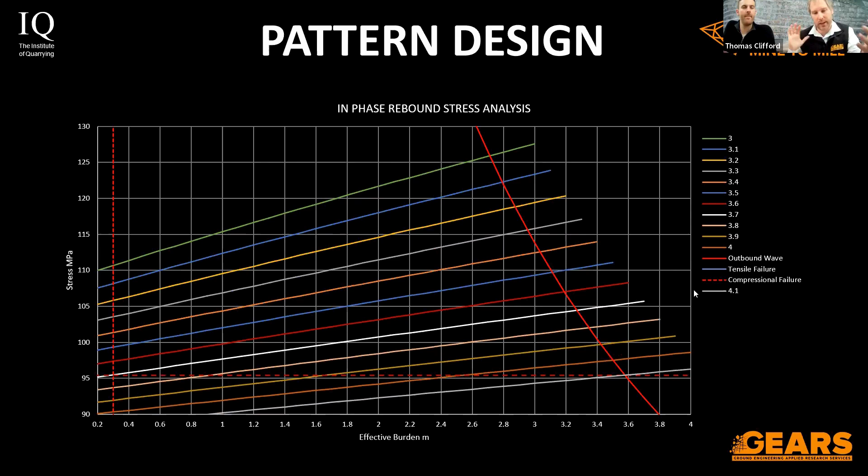That enabled us then to build up stress analysis, and then we can look at that in both the compressional and the tensile wave coming back to pick out what's the ideal effective burden and spacing from that.

We could then start running various scenarios. On the left-hand side here, we're comparing a staggered pattern against a grid, and actually there wasn't really any difference between the two. So that confirmed what BAM had said - they said it doesn't really change things.

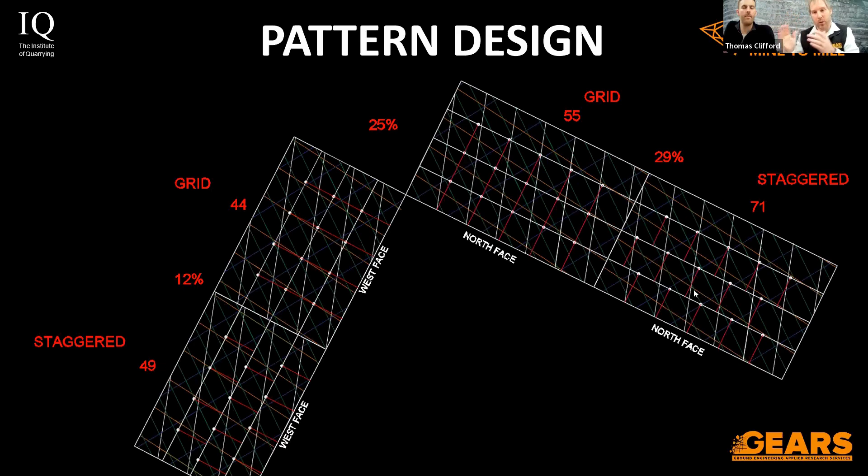Where on the other side, actually there was a big influence - a big change whether it was a grid or a staggered pattern. But what we could then do is not only look at whether it should be grid or staggered, we can actually look at what's the optimum face direction and what kind of blocks we would expect if we rotate that face slightly.

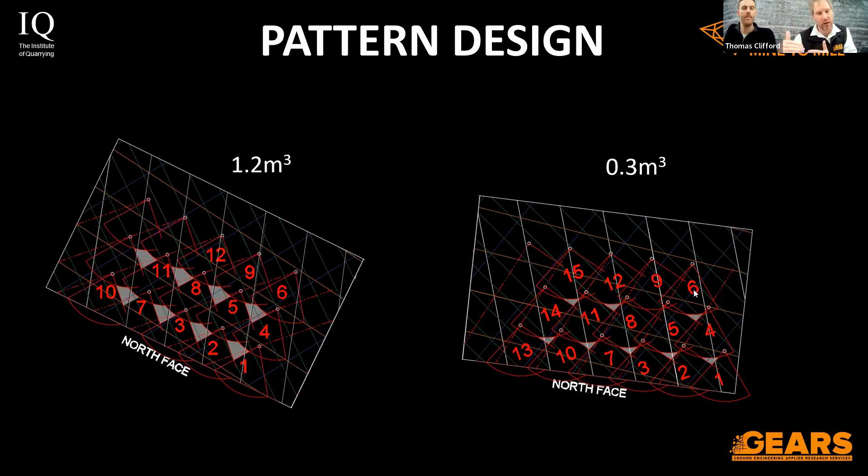So you can see here, just rotating that northern face very slightly means you can work with the geology and get that residual block size down.

I'm going to finish off with some recent work we're doing with Tarmac, and we're talking to AI Industries about this too - looking at drones for face profiling. We've done quite a bit of work with Tarmac over the years and developed a safe system of work for non-surveyors, basically quarry managers and shot firers, to safely use drones and train them up for face profiling. What's exciting is that you don't need particularly expensive drones - this isn't a high cost requirement.

So we produced the Tarmac standard, and that got adopted basically by QNJAC. Now you'll see a lot - if you work for Tarmac, you'll pick up the QNJAC standard and see a lot of the words we put in there carried across. If you're not familiar with this, do have a look at the QNJAC drone standard - there's some good, useful stuff in there.

Because we've got access to some really powerful software, we're able to compare different drone flights and 3D models to see how accurate they are. The software we run is by Maptek - I think it's about 25 grand, so it's an expensive bit of software.

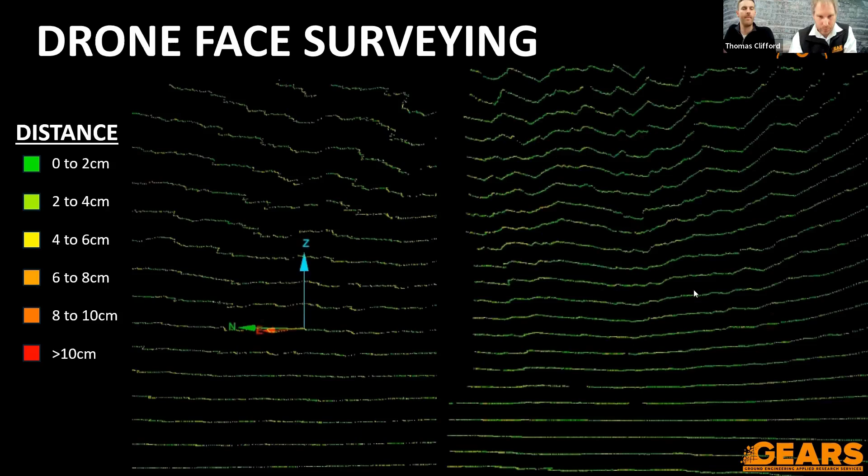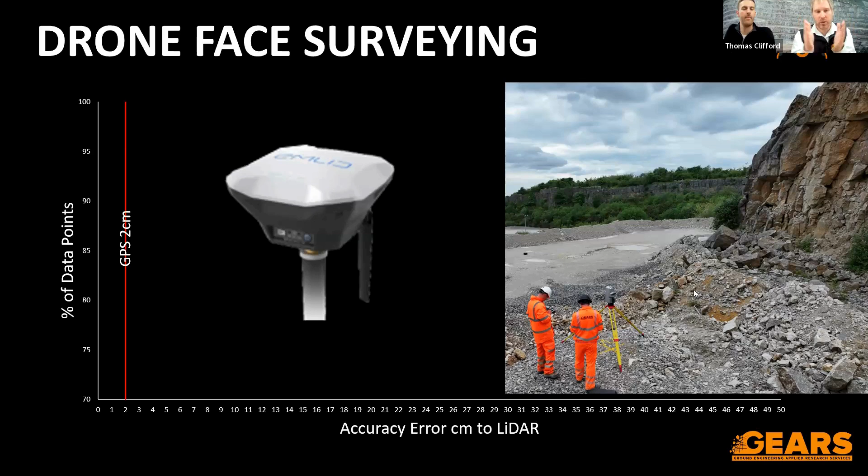But that's enabled us to work with AI Industries' LiDAR scanner - I think there's a £180,000 scanner sat there, and it can do a very high density profile, every couple of millimeters, a point on this space, very high precision. But because everything's working off GPS, your perfect alignment or accuracy can't be any better than 2 centimeters, just because that's the GPS error.

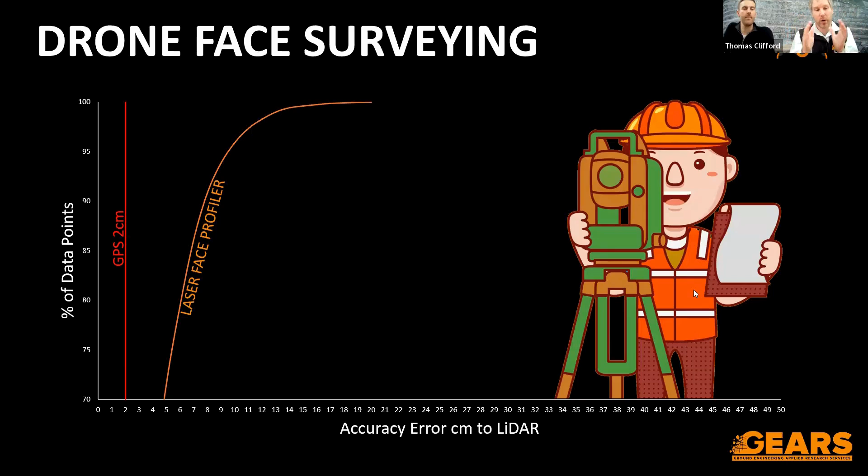So the LiDAR scan, everything we're going to say is within 2 centimeters. We then compared that with a standard laser profiler, and because we've got millions of points, we're basically looking at 95% of the data - where does that plot in terms of accuracy, what falls within it. So a laser profiler was within 10 centimeters of the LiDAR scan.

We've developed a way of flying the face with Tarmac, and AI uses basically the same methodology. When we flew it, we were within 2 centimeters at 95%. So the high quality drone surveys are just as good as the LiDAR scan, which is amazing. It was really good.

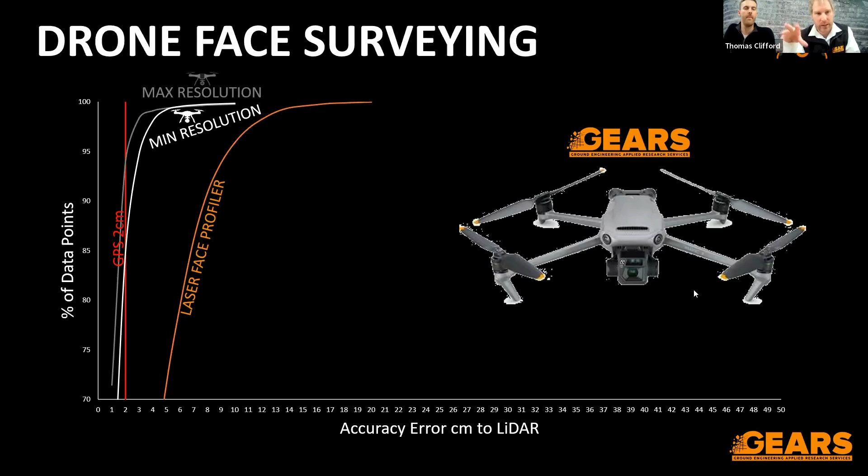And we ran the software through two speeds - you can run it through most people use Pix4D or similar software, and we've got one as well that we've written. With that, we ran it on the fastest and the slowest, and there was only a centimetre difference in terms of accuracy, which is really important for shot firers, because you need to collect that data and be able to turn it around. The fast analysis took about 20 minutes to process.

Now what this is all leading to is that when the drone is not flown in the correct way with enough overlap, and depending on how stable the flight is and the order you process it with the software, you can get quite poor results. So we audited a couple of different drone surveys done by various contractors for Tarmac and found some significant errors. That's the work going on, and the idea is Tarmac are embracing this and starting to put some quality control in for their contractors, with their in-house team already adopting all of this.

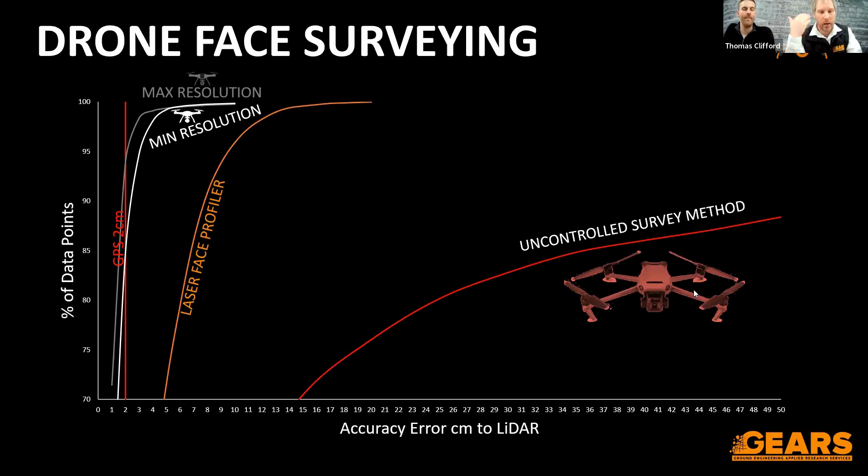And as I said, we're talking to AI Industries on Friday about similar things. So watch this space - that's coming through. I'm quite excited about that.